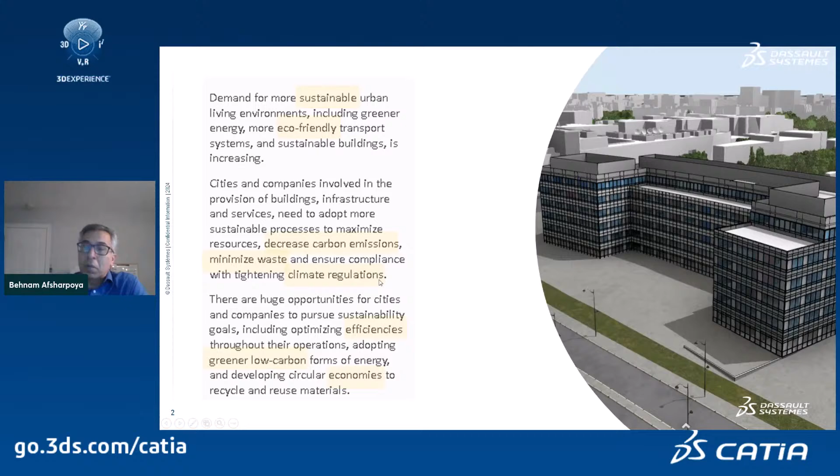Today I'm going to talk about building performance optimization for sustainability. This is about how we can build structures with more sustainability, reduce carbon emission, and build structures that are greener with lower carbon consumption, while also being economic. We don't want to lose money to be green. So at the same time that we can be green and reduce carbon emission, we can also make buildings more economic and more cost saving.

The reason that buildings and structures in large cities get more attention is because there are more people living in larger cities, and we will see that 75% of the global CO2 emission is coming from cities. So more people in cities, the CO2 emission would be more. To make the world more sustainable, we can focus on large cities, and especially structures in the urban environment.

We can reduce the waste, and we can use greener sources for energy, like solar panels or solar energy or other friendly sources of energy. But on the other hand, we need to find ways to reduce the usage of energy or wasting energy. There are different ways to do that. We can use better materials, or better ways to reduce the amount of energy that we are consuming.

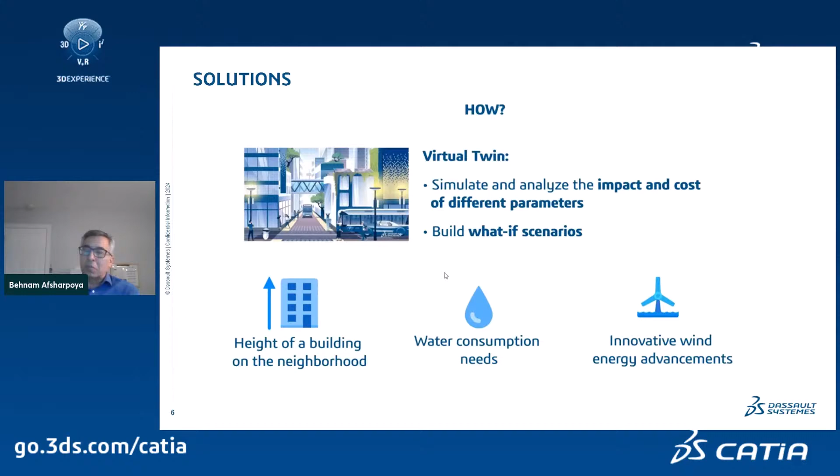In this way, we need to build simulation models to evaluate the methods that we are using and how much impact they have on the environment and the consumption of energy. So we can build different methods and models and simulation models to simulate this and analyze it.

One of the very high level methods is the system engineering method for decarbonization. With this method, first we define our requirements, how much we want to reduce the carbon emission, and then we try different ways to analyze it. With this analysis, we can evaluate what type of methods or combination of methods would be better for reducing carbon and making our city or structures greener.

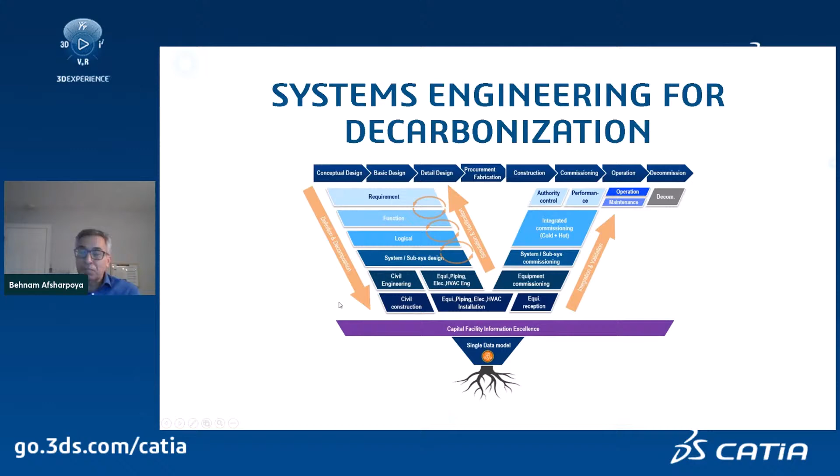One of the methods was developed by the Department of Energy's National Renewable Energy Laboratory, NREL. They have developed a tool called EnergyPlus. This tool provides a software engine for new building and retrofit design, code compliance, green building certification, qualification for tax and utility incentives, and real-time building control and operation. All of these are in one package developed by the Department of Energy.

This tool helps engineers, architects, and researchers model the energy consumption of housing projects or residential or commercial structures, and analyze the heating, cooling, ventilation and lighting systems of the building, and all of these can be modeled in one package.

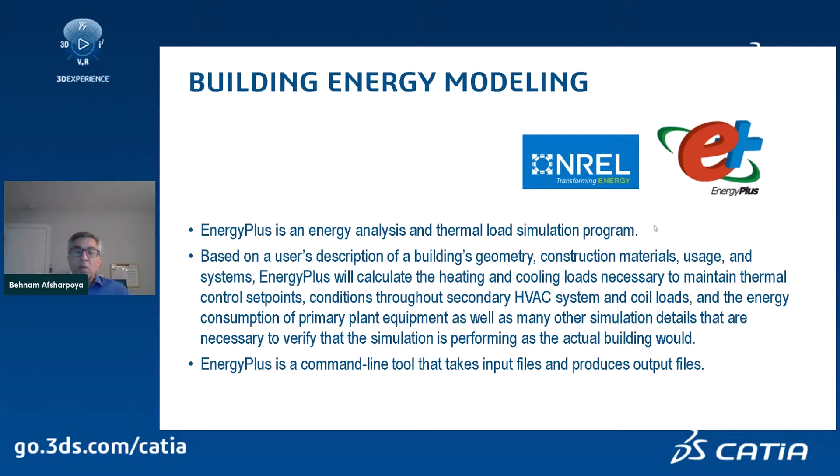NREL, with this tool EnergyPlus, provided a platform where architects and civil engineers can analyze how the HVAC system performs and how they can reduce the energy consumption of the HVAC system and cooling system. All of these are packaged in EnergyPlus developed by NREL.

NREL is also supporting a large number of smaller companies, startups, or private sector firms that are developing tools around the EnergyPlus platform. There are several tools developed by other companies in the private sector that provide services to engineers and architects to design their structures or buildings greener and with lower energy consumption, so they can choose better materials or better tools for cooling and HVAC systems.

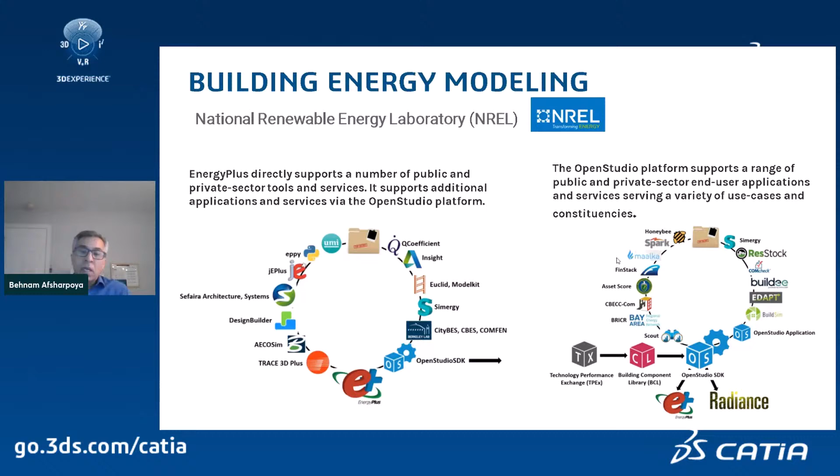This tool provides a very nice graphical output that can show over time, over a year or a month or a day, how much energy is consumed in different locations of the building, and how we can reduce energy consumption in different zones, and we can analyze the whole control system, windows, blinds,

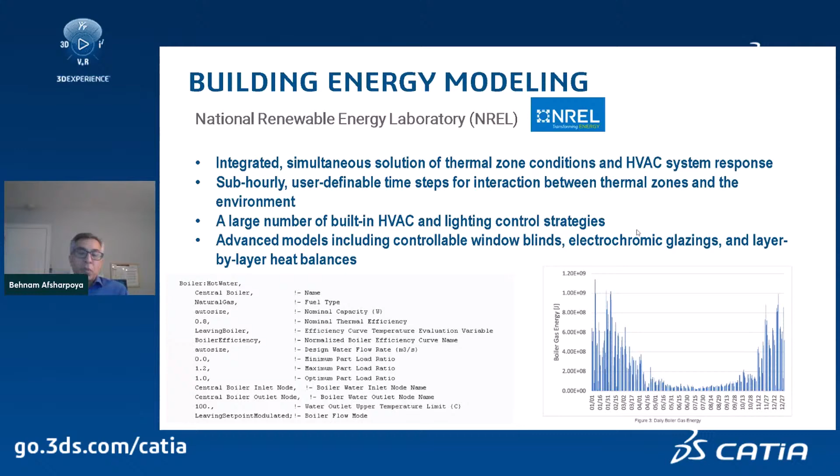solar panels, all of these types of tools that we are using in the building, to see how they impact the energy balance in the building and how they can reduce energy consumption in a structure. One of the tools that we provide from Dassault Systèmes is called Dymola.

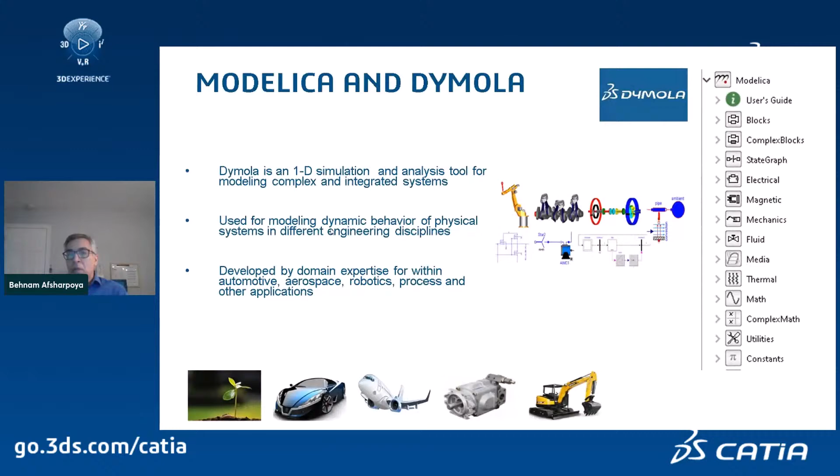It's a 1D simulation tool, multi-physics and multidiscipline tool, and it's a very efficient tool that is a backbone of many of these types of analysis. Actually, this tool is using Modelica language, and Modelica language is used in many of these types of tools that are developed by the Department of Energy or national labs. Modelica is a quite efficient tool, user-friendly, and easy to implement.

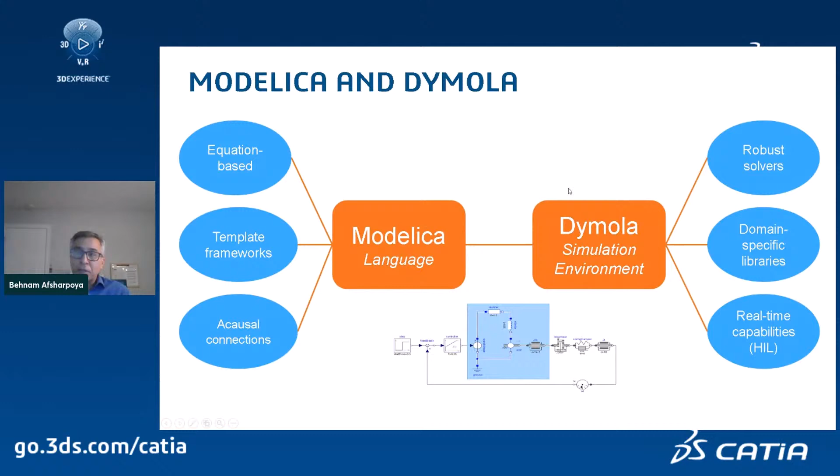Dymola is based on Modelica. So it's using Modelica, which is equation based, it has many frameworks and is an acausal language. And for the same reason, Dymola is quite efficient and also user friendly.

Now, the same Modelica language and Dymola is used by national laboratories like Berkeley Lab, and they have developed the Buildings Library. Buildings Library is similar to EnergyPlus, an open source library that can be used by energy engineers and architects and also system engineers to define and design control systems for energy storage, energy distribution, and also decarbonization energy systems in existing buildings or buildings that we want to plan and design.

So these types of models include cooling systems, HVAC systems, heat transfer simulations in different scales, small scale or very large scale, and also control systems, multi-zone airflow and cooling systems, and also electrical distribution systems over a very large micro-grid system to analyze how we can have multiple sources for energy generation, and also nodes that are consuming energy. So we can create a network of energy generation and consumption and analyze it for data centers, commercial buildings, or residential projects.

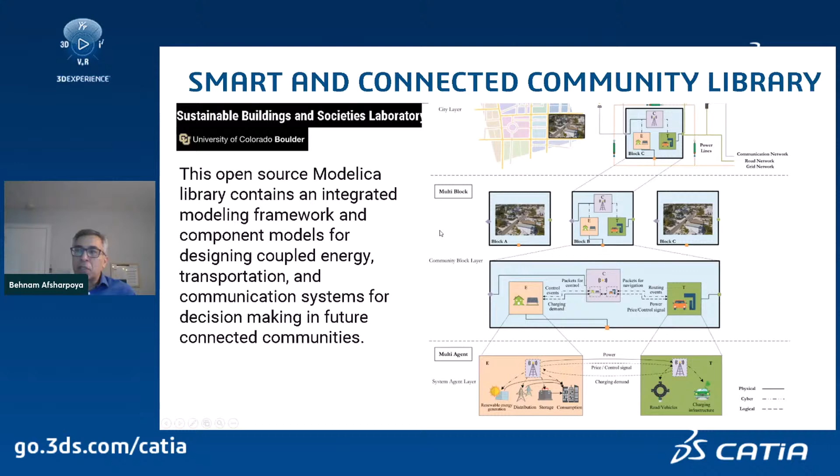So if we are developing a city or a small village or a kind of community, we can define how the energy is consumed in the community. If there are some schools, supermarkets, shopping centers, and also residential areas with different types of zoning, like multi-family housing or residential zoning, we can define how the energy should be consumed, and also how the energy is distributed in communities.

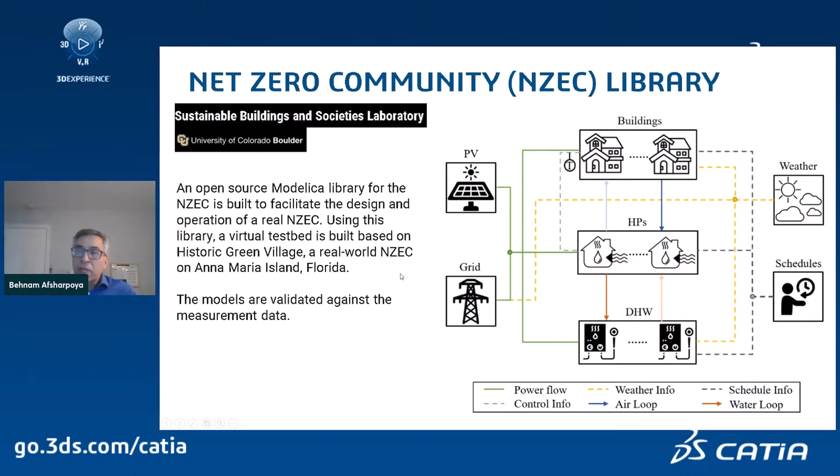There is also a library developed by, again, University of Colorado Sustainable Buildings and Societies Laboratory. This tool is also based on Modelica language, and it has actually developed a village that is self-sustainable, and it doesn't need energy from other sources. This is actually a green village that is generating the energy within the community and also consuming it in the community. So the community is self-sufficient and is not using energy from outside. This was also developed as a village in the real world, in Anna Maria Island in Florida.

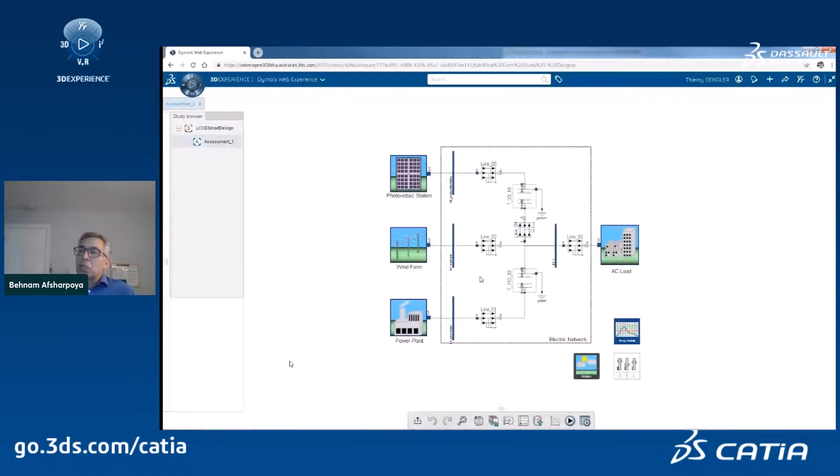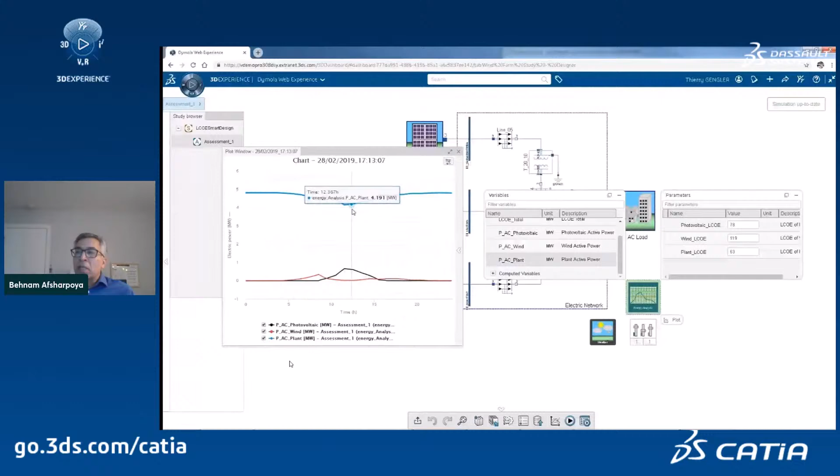So the tool that Dymola is providing is actually user friendly. As you see, we can develop multiple nodes for energy generation like wind turbines or solar panels, and then we can analyze the power plant, and we can analyze how the energy is consumed in residential projects or a city framework. We can analyze how the energy is generated over time and also consumed, so we can have sustainable sources of energy like wind turbines or solar panels.

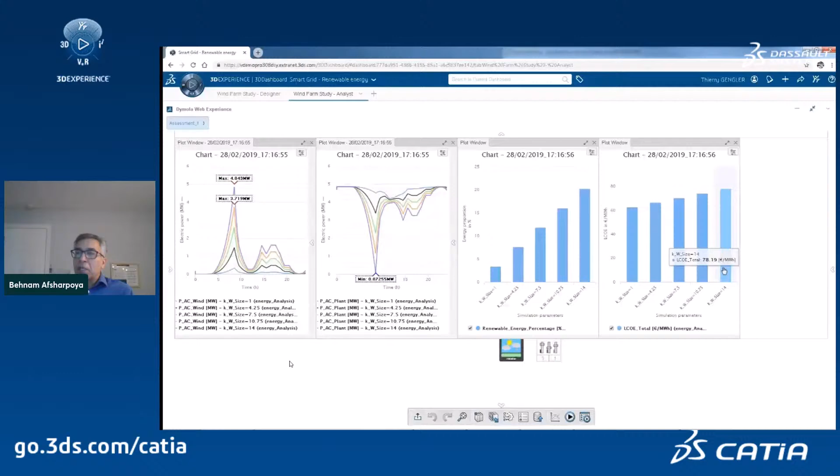And we can be sure that we can store the energy for different hours of peak usage, and we can analyze how much energy is used in different hours to be sure that this energy is stored properly and can be consumed by different consumers.

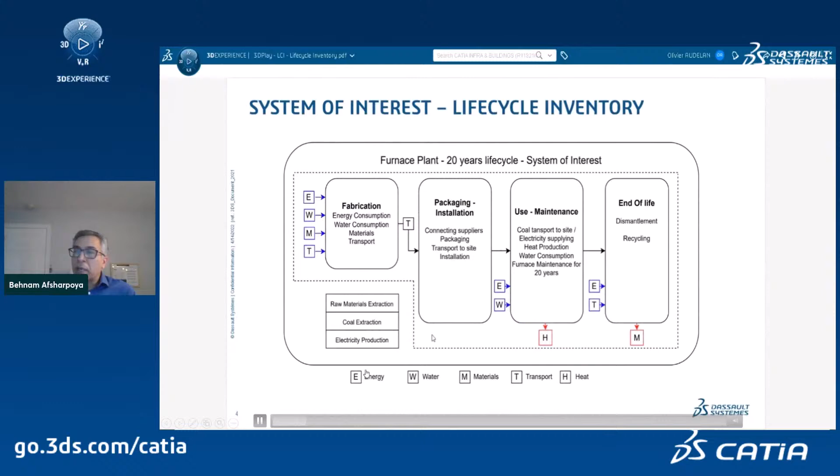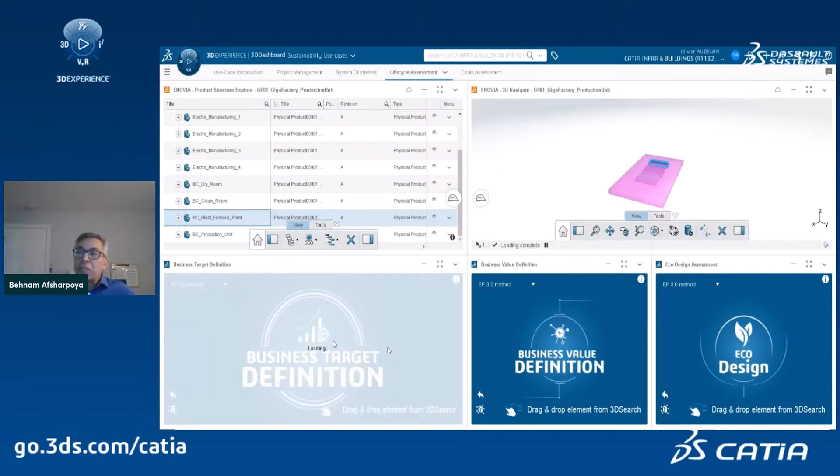So we have also developed on the 3DEXPERIENCE platform some system engineering methods with which we can analyze, for example, how heat is generated and consumed in factories or industrial projects. So we can analyze how much energy we need for that factory, how we can use green energy sources like wind turbines or solar energy, and then how much energy is consumed for different aspects of the design and also manufacturing. So we may use more eco-friendly materials that consume less energy, generate less CO2, and also use fewer resources from the community or the environment.

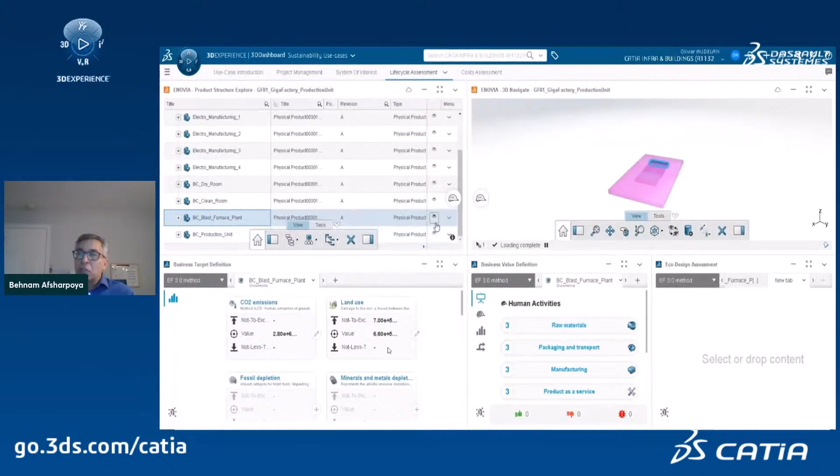So with different types of packaging, different types of materials, or different manufacturing methods, we can analyze how much energy we are consuming, and also how raw materials and resources are wasted and reused in the process of manufacturing. So the designer or the manufacturing engineer can decide what type of method or process should be used to reduce the energy consumption.

So not only for residential, we can provide methods to reduce energy consumption and also generation of waste material. We can do the same for manufacturing and production of different goods from different companies. So if we are manufacturing an airplane or a car or furniture, we can see how we can use different methods to reduce the amount of energy we consume to produce that product, and also how much material is wasted or what the impact of that product on the environment would be, to reduce the amount of waste material generated.